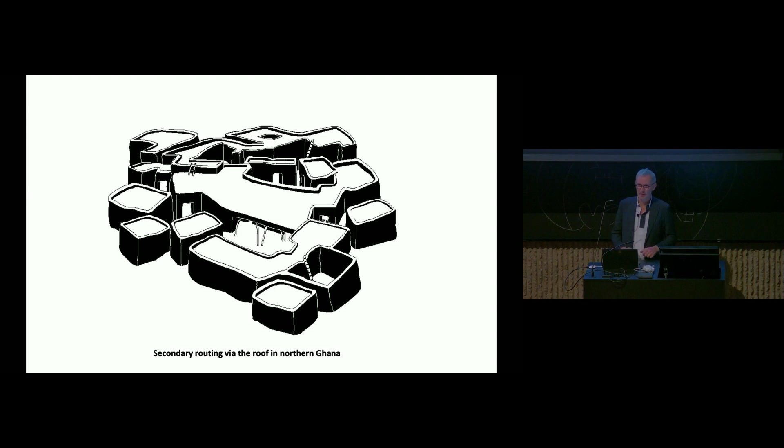And he always came, and that was the most amazing time for 5 years, that he came to Amsterdam 3-4 times a year. And then we sat down and he showed me all the pictures that he made from the research we did. We sent them out and he showed me the pictures. That was also like the biggest gift I had 4 times a year, to see what he had.

People dry food, they're protected from animals, and this concept of not having streets but using this double layer, I find very interesting in a way. Sometimes I skip simply in this whole idea a millennium or 2, but it's just a very rough, and it's also not linear, it's not chronological.

Most of the changes that happened in the world, sometimes things happened at 20, 30 different places in the world simultaneously, and sometimes it was a hybrid for 1,000, 2,000 years, it turned out. I was quite surprised to see that. It went very, very slow in a way. But as it moved on, you saw that compounds became more communities. Because of language, speech, writing started. So organization of life became more complex.

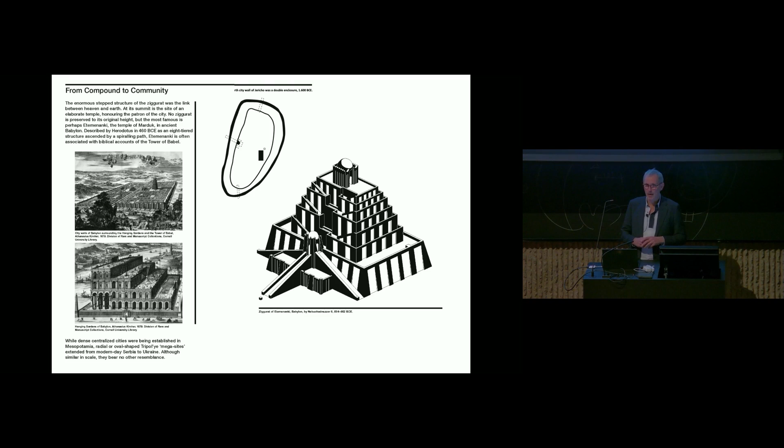And you saw the rituals became also more complex, and there were power systems, so buildings became bigger, became more important. Quite interesting, for example, to see the first ziggurats and the Babylonian buildings, etc. And religion kicked in, of course, very much. So power systems, religion, etc. Ritualization is something else than religion, in a way, with a very big hierarchy.

So there were also the first clear separation from nature, mankind and nature, becoming dominant and changing from ritual to divine worship. Dominant empires, Egyptians, Greek, Roman. There's more than enough to tell, of course, of this. And you saw that

while this happened, it also became that nature was seen as more chaotic and mankind as logic, which is, I think, some people say it was the biggest misunderstanding of humanity. Others say, no, that even started earlier, at the beginning of agriculture, which is a big misunderstanding because that separates us from nature, also from Earth. It is a cleansing of a natural system.

Skip fast forward and you come to a way more complex modern mankind creating societies, clear migration, power systems, etc. We're talking after the Egyptian, Greek, Roman eras, etc. And what you see is in these Middle Age fortifications that with attack and war, etc., you had keeps and mounds and all kinds of amazing structures that did a lot for building forms.

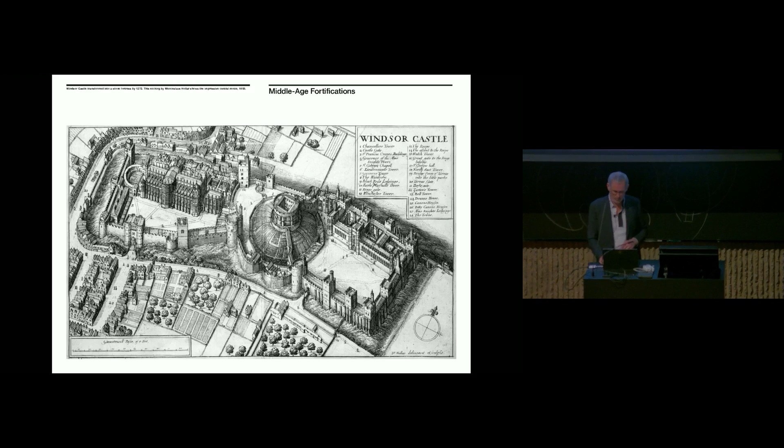First of all, they were always high because there was no gunpowder. Later on, gunpowder came and they lowered walls. They were not higher, but they spread out because they wanted to get rid of the distance that they could overthrow with gunpowder. Quite amazing to see. You see control of people, etc.

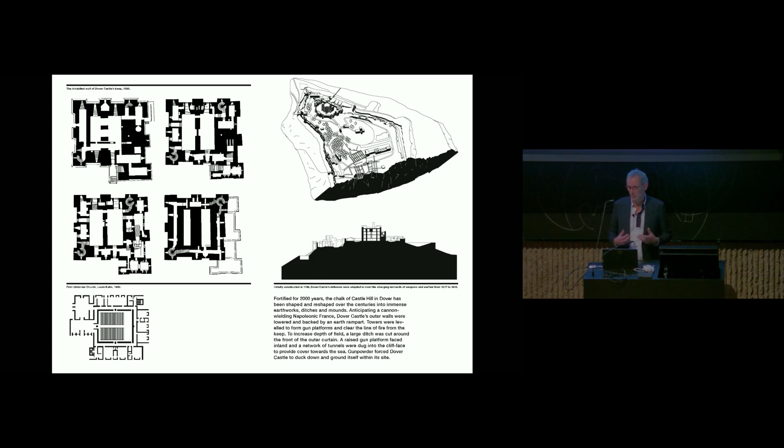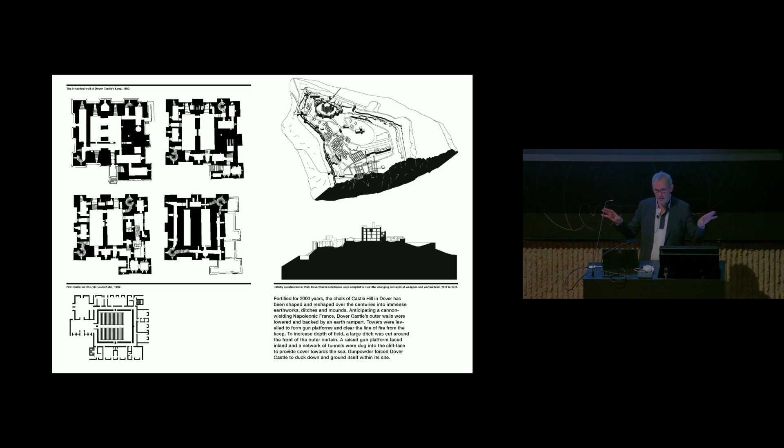And here you see, for example, the Castle of Dover, where all these elements came together. How to protect, how to stay alive, how to keep the power. Amazing systems, for example, under the grounds of the Castle of Dover and the chalk, where they had all these big tunnels from where they could shoot.

Again, fast forward is also what you see around 15th, 16th, 17th century. Public space when the focus shifted more to the private. Life was mainly public, and what you saw also is that the nowadays dominant corridor that connects rooms did not exist really. You went from room to room. And this public space became more private.

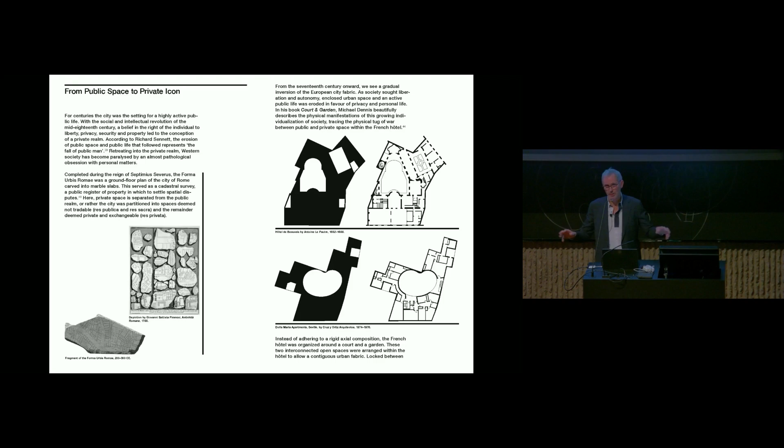What you see is that buildings also, they separated themselves from public life. First of all, it was like one porch with little openings in it. It became like a freestanding building in a couple of centuries.

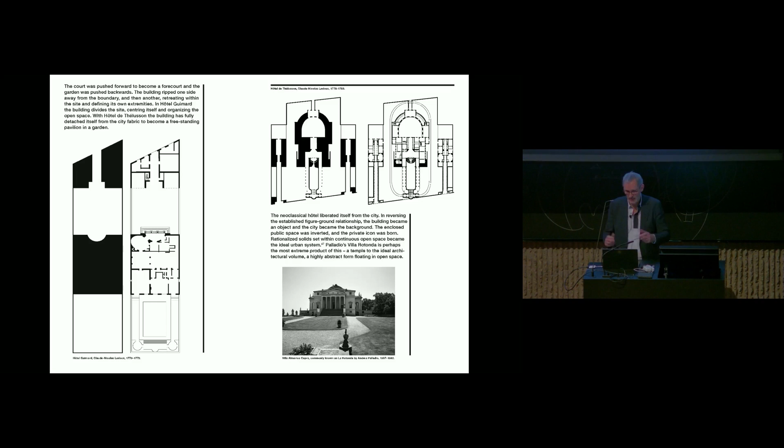Then I'm talking about the dominance of the freestanding building, where Palladio, of course, with the Villa Rotonda, is like the clear object in a free space, where first of all in the cities it was castles and buildings and hotels that had communal walls. Often all four walls were communal, and then you had courtyards that were sort of separated out. Well, Palladio's Villa Rotonda is of course exactly the opposite of this.

And what I came up with, I sort of build it up to a certain moment that had to do with also a moment in time, 1964, which is the only year that growth rate was above 2%, maybe 63 as well, but 64 was the highest growth rate of mankind ever. Since then it declined. I took 64 simply because I was born in 64, but it is of course about this.

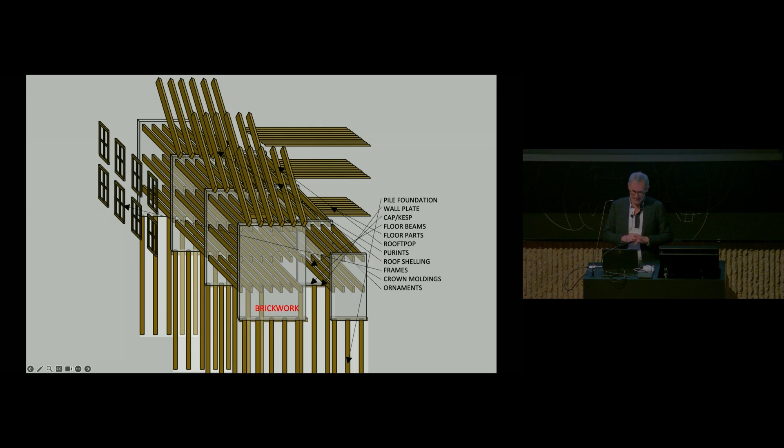But there's also something else, which is about build quality. This is the house I lived in for 30 years, which is built from wood, a little bit of brick. It is in fact completely circular. It can adapt amazingly. I fell in love with the house, and I sold it last year, and I should not have done that. I still miss it. I miss it tremendously. I renovated it completely, and it is amazingly well built.

Here, look at the construction. These are wooden beams. They were transported from South America. By boat, can you imagine? Those beams didn't come from Europe, they came from South America. And they can carry an enormous load.

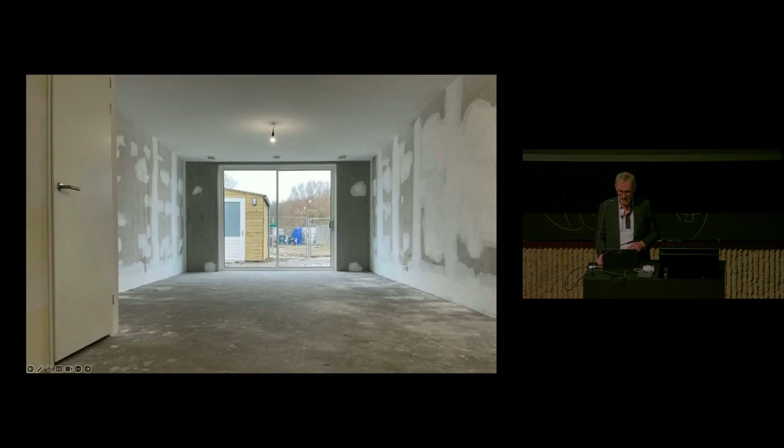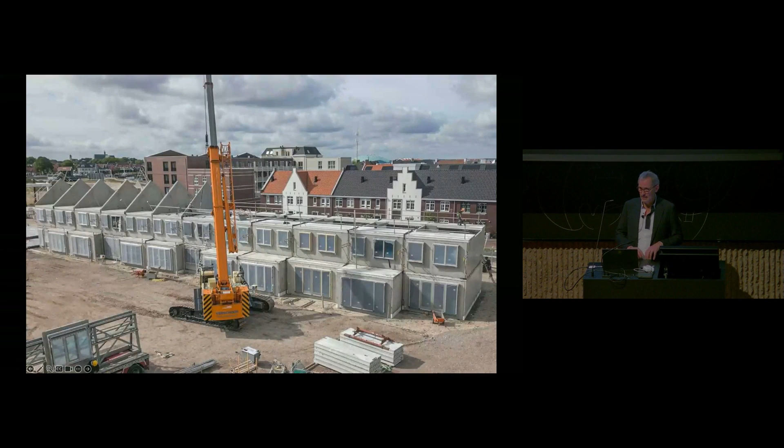This house I'm living in now, it's from 1880. It's flimsy compared to the other house, which is from 1620. It's built way less sturdy. This house is finished. Huh? In Holland, they call this finished. This is the way you buy it, and I think it's sort of a disgrace. It's cardboard made from concrete. It's not sustainable. It's not circular. So what the hell happened with architecture? Why did we not solve it the way we did transport, lighting, health?

So it seems almost to be becoming irrelevant, the way I see architecture, but I think there is a proven relevance that only increases with so many people on Earth, with limited resources, the globe turning against us. We need to do something.

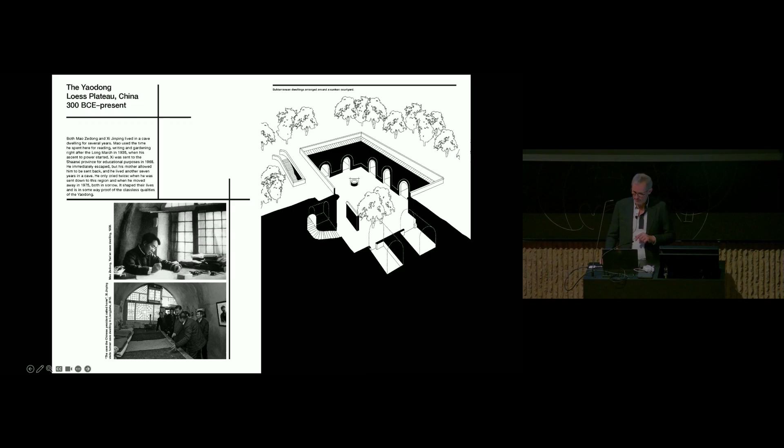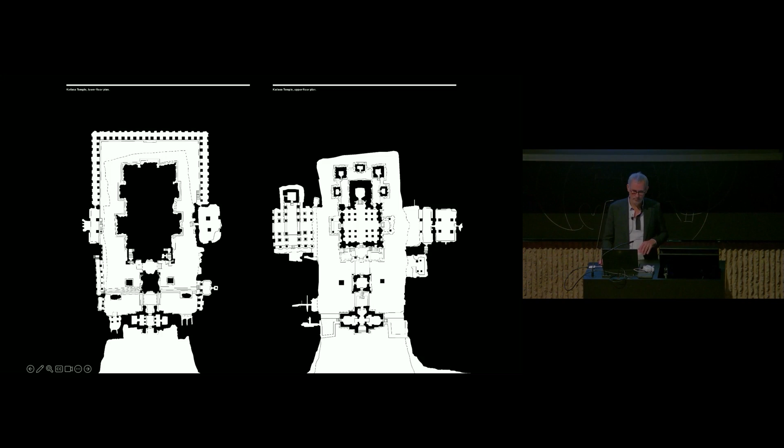A strategy of how to carve out, amazing. You see this rock above your head, which is, by the way, 10-15 meters of floating rock there. I was quite stunned. I also went myself to Lalibela, because we were commissioned by the Dutch embassy in Addis Ababa, and we wanted to build as much as possible with local materials, local people, local techniques, and this was for us like a revelation to see this.

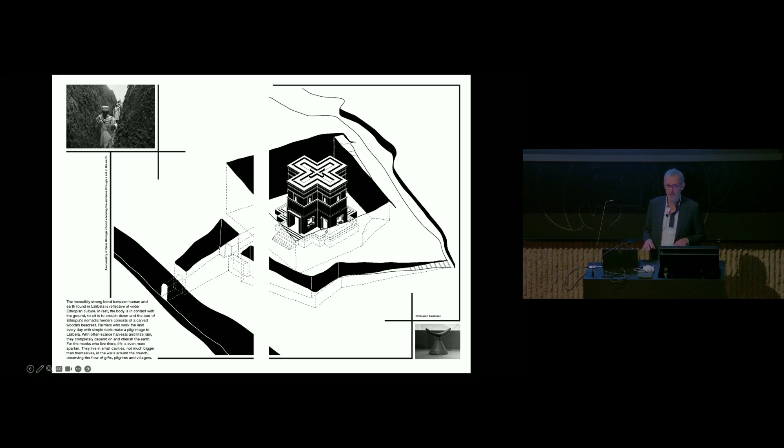How this 700-year-old building is still standing perfectly upright. It's carved out with ramps for ceremony, monks live in caves there. I was extremely impressed how this is organized. A ceremonial place, but so incredibly beautiful.

I worked for Miralles in Spain for a while, and in part on the Igualada cemetery, some small extensions at that time, because there was no money to keep on building, so it went little piece by piece. By the way, he has worked with this amazing idea of the drawings of Garcia Lorca with the tears and the grave on the ground, which is this embedded idea of in a hillside.

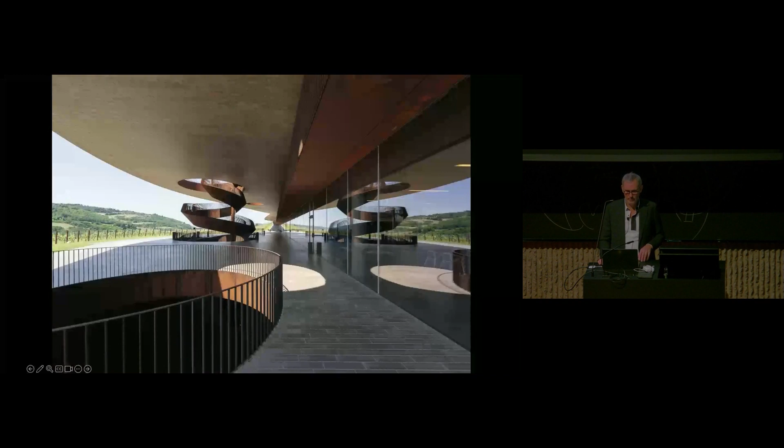Very briefly, Antinori Winery. Go and see it. Amazing how they have gone, after 27 generations of Marchesi, the youngest generation, two sisters said, let's go back to the winery and not stay in Florence in the city. And they built this underground winery, a huge complex like this. And of course, this is what we did.

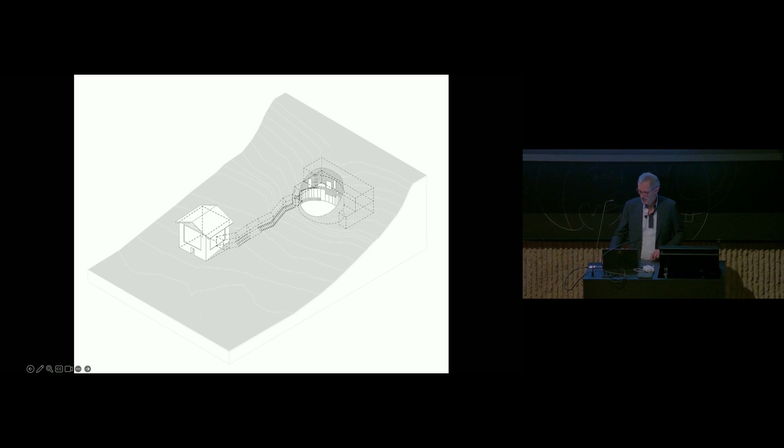And from there, through an underground tunnel, it's sort of a beautiful routing that is more romantic, I thought, for a holiday house. And as I said, that exploded in my face and was rented out ever since. Having a lot of privacy, because it's in the village. Everybody thinks it's outside, somewhere remote. No, it's not. It's next to the thermal baths of Peter Zumthor. It's in the village, but you have this amazing privacy and beautiful view of Alp Tomul.

And lots of fun, of course. I mean, that's what you do in a holiday house, where the transition from inside and outside is very intimate, and the terrace is becoming part of your house in a way.

These strategies of burying we also did with the Novo Nordisk corporate headquarters, the Global Conference Center. There was a big dike 6 meters above the lake, which is an artificial lake, by the way. But we were not allowed to touch the building or extend it. So we made it underground, connecting with conference rooms, opening up the dike, overlooking the water. They asked for very specific, different meeting rooms. That's what we did. It was a layout.

Also, as you see here, maybe in a very small way, it was also a bit, for me, a tribute to Enrique Miralles, who died suddenly because of a brain tumor. Sadly enough.

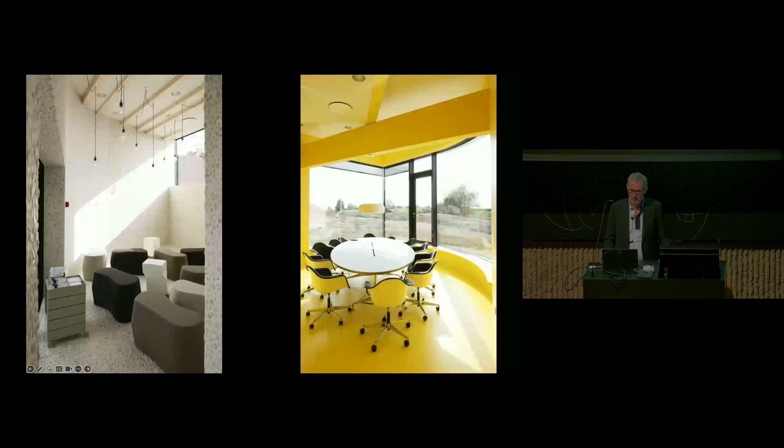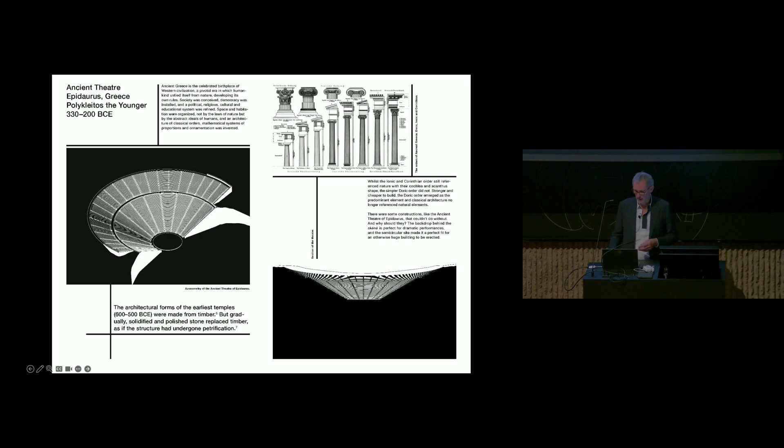The next strategy, embed, as I said, which is more in an open air hillside level where, let's say, underground and above ground merge in one thing, which very obviously, of course, happens in the ancient theaters. Beautifully laid out, acoustics amazing. We can learn a lot from that.

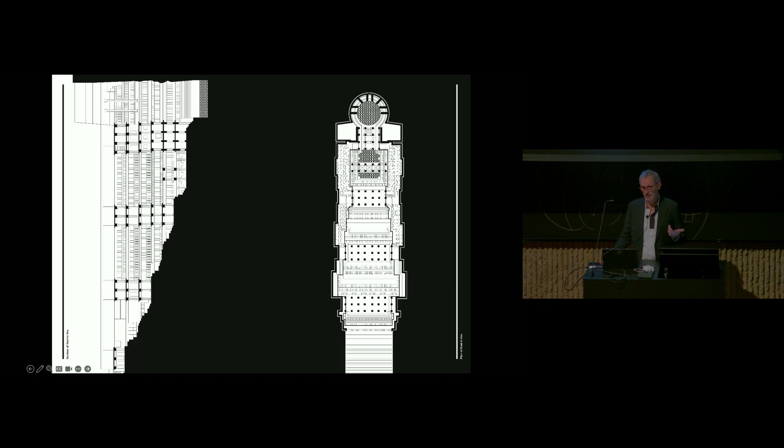Or the 4,500 stepped wells in India, most of which are now used as trash bins, just filled up with dirt. Some of them are restored. It's becoming a touristic venue, but in a way, in the near future, it would be the place to at least have clean water, because they still work. So we analyzed all these. And you see here the most amazing structures we see there.

Or hillside villages that work very intricately with animals downstairs, people upstairs, and then in the level in between you have the routing in front of the houses. Beautiful communities. Almost impossible to go to because you're not allowed to travel there. But luckily we found a stewardess from KLM who secretly went there and made photos. She was a good photographer, and she lent us her images.

Which relates a bit to the Dogon and to the Catalhuyuk roof typology, going in. But this is quite amazing, as you see the roofs here. People gather at twilight on those roofs, and they have ceremonies, and they marry there, they have parties. It's quite amazing.

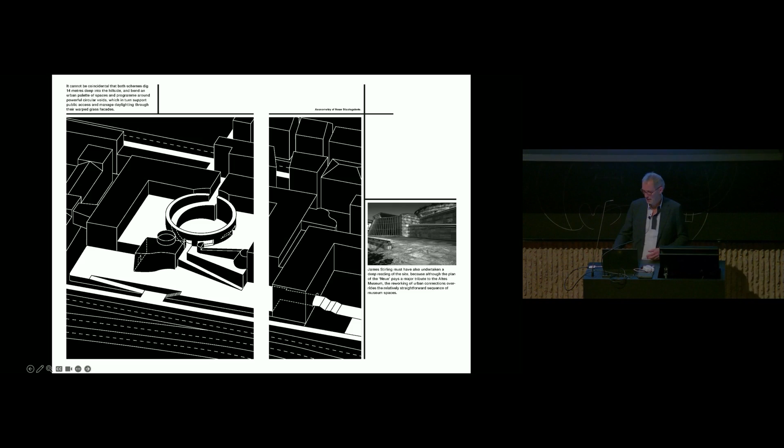But more recent examples, I think one of the routings through a building by Stirling, I think is quite amazing. The Neue Staatsgalerie. Or a very temporary Bangladesh where you have a lot of floodings, where one simple dike and a leveling out creates a beautiful embedding.

We did it in some houses where you see this also, of how to relate to the rock or to the difference in level in another way. Where chalets, this house of the famous painter Balthus. I think it's the most gorgeous chalet you can imagine in Switzerland, in the Gruyère. So how can you make a compact house? Because nowadays they all build these sort of compounds of little chalets, which I think is quite ugly. I wanted to make it into one building.

Garage, the guy is a Porsche race driver, rally driver. Lots of problems with snow. I said, let's do it downstairs and then elevator up. It's a bit of a James Bond house. But it relates to the different levels very much, and that's what I like. So every room you can easily enter by just going one or two steps down or up, as you see here.

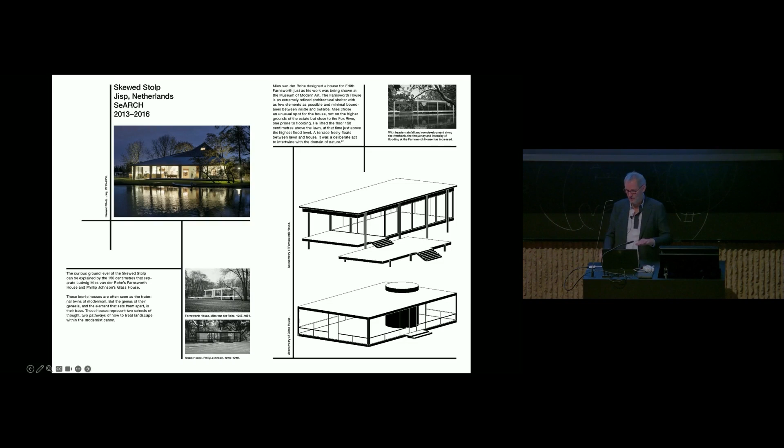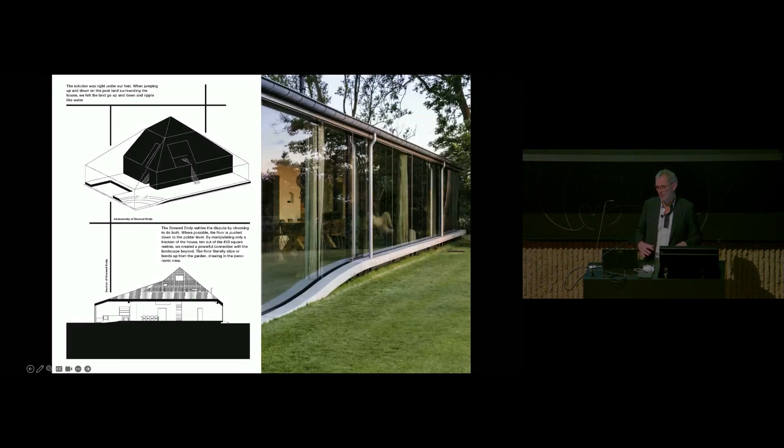Sometimes it can be very subtle, the embedding. Like this, very Dutch. What I did was maybe not wise, because I elevated the house, because of flooding, and I lowered one part of the house, to at least connect to the garden better, as you see here. It just moves down. The client didn't understand at all why I would make sort of a rolling floor down to the grass, as you see here.

He said, well, I can't use those square meters. I said, come on, you have a house of 450 square meters, so those 10 square meters that are a bit quirky, doesn't matter. Funny enough, they now love it, because when the dog comes in with wet feet, it's too slippery, so he stays there. He doesn't spoil the house.

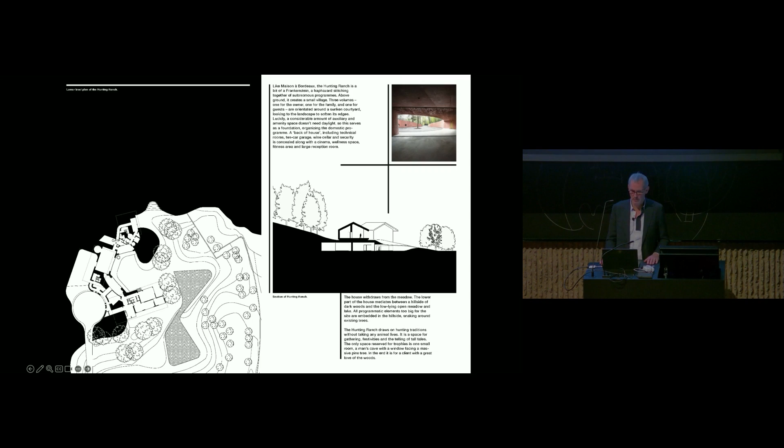Or here, a house that was way too big, we convinced the client to make the house half the size, so it's now 3,500 square meters only. I think it's quite ridiculous. We made it more sustainable than he wanted, but not as much as I wanted, but at least you can do something. Most of the auxiliary spaces we made underground, so that at least you have some acceptable, I think, site specificness of a huge house for himself.

As I said, this embedding can be very subtle. Here it's a little house for a lady that works at the biggest bird society in Holland. She's a bird watcher, so we made an almost snake-like house that relates to very different landscapes, although the house is of course fixed. But this snake-like house gives her the possibility to watch the small birds in the woods in the front, to watch the little lake as you see in the top, the bigger birds, the sea eagle even comes here sometimes.

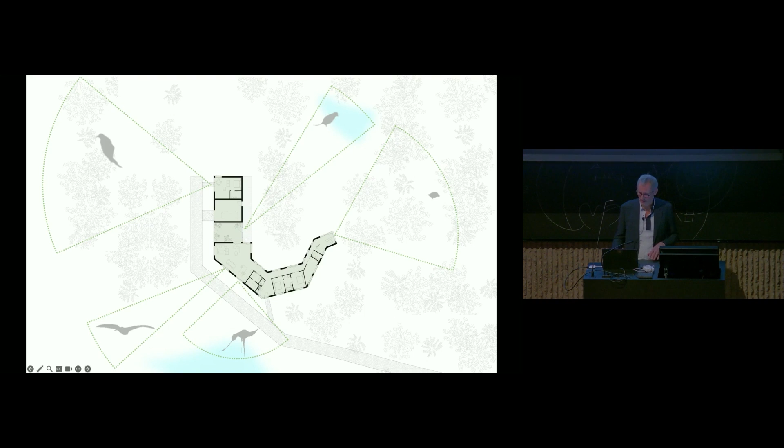The migrating birds in the polder on the left you see, or the somewhat bigger birds in the salt marshes. There's some salty kwelder coming out at that area. So how one simple form can relate to very different landscapes was the idea, as you see here.

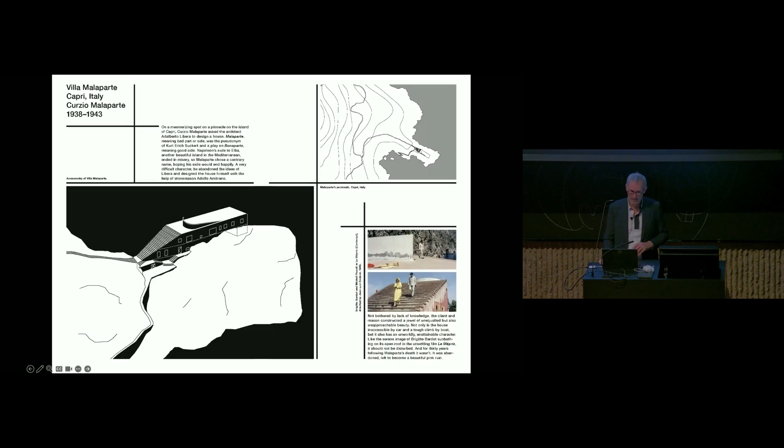Third strategy, absorb. That is about where, let's say, the identity of the landscape is sort of pushed inside the building, was our idea, with these beautiful examples of Casa Malaparte, the most gorgeous house. Most people don't understand the scale of this house, I think, because it's enormous. It's absolutely enormous. But there are gorgeous examples in Brazil, for example, this Costa Brava Club by the brothers Menescal, which is a very brutal building.

It is extended 4 times, but this one thing makes it, which is this rock that sort of comes up in the patio towards the main pool. I think it's quite amazing how site-specific and how beautifully it resonates with its stunning landscape. And even the main pool downstairs, the saltwater pool, where the rock is almost like a big whale waiting in that pool.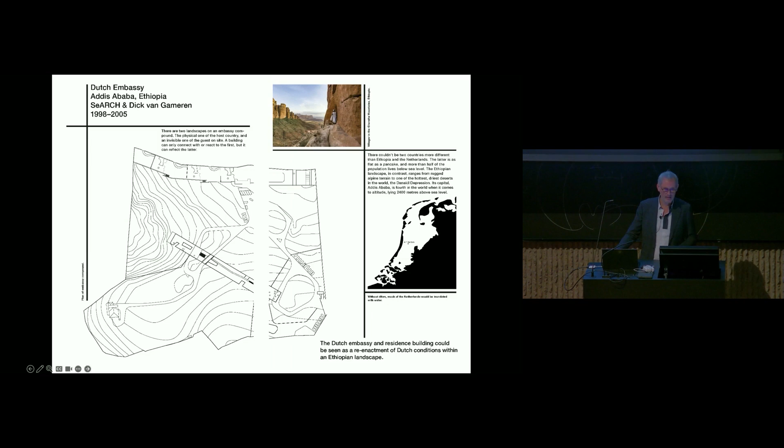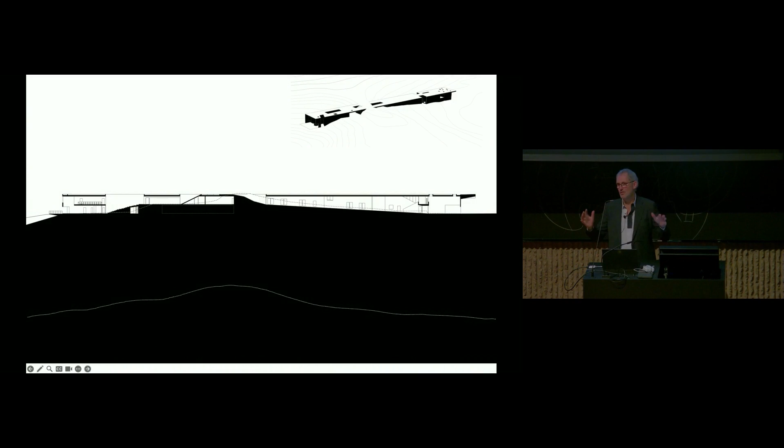As I said, we did the Dutch embassy, where we try to sort of do what Lalibela did, but of course you can't carve out an embassy. But at least we try to relate to that and sort of use the relief of the landscape. This is Ethiopia. Well, this is Holland. So we made this beautiful water roof. In the rainy season there's water on the roof, which is the horizontal level of Holland, and then the relief, which is not that much there, is used to separate the residence from the chancellery, and then the ambassador can walk over the roof, a bit like God can walk over water, to his

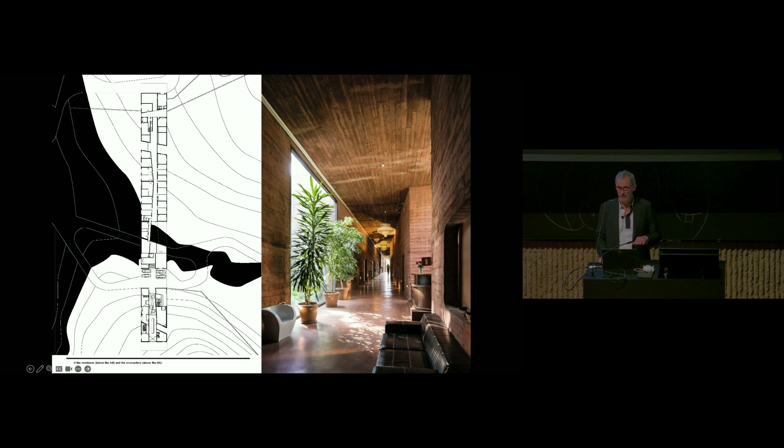department. And here you see the main corridor in the embassy is a ramp that connects all the rooms, and then at the very end you come out, you go to the roof, you go over, you can go to your house as ambassador. This is the main routing.

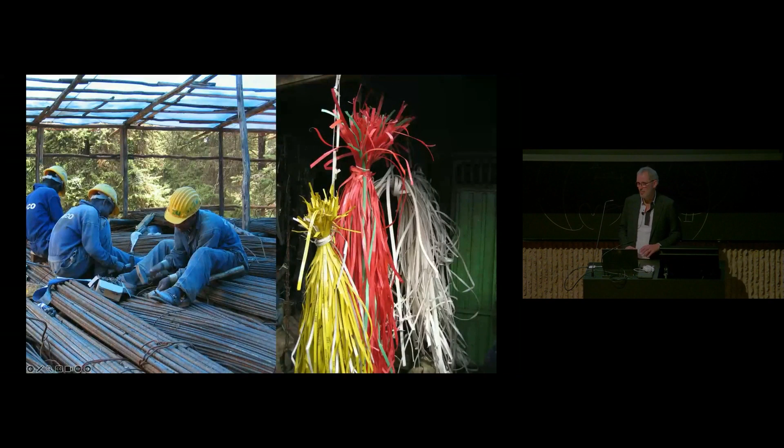And what we learned from Ethiopia was amazing, is that if you have limited resources, you reuse everything. I was absolutely stunned by the ingenious way of working, of reusing, etc. And since then we have implemented that in our work. Of course, completely different, but let's work in a different, more efficient way. It's all efficiency, in fact, in Ethiopia.

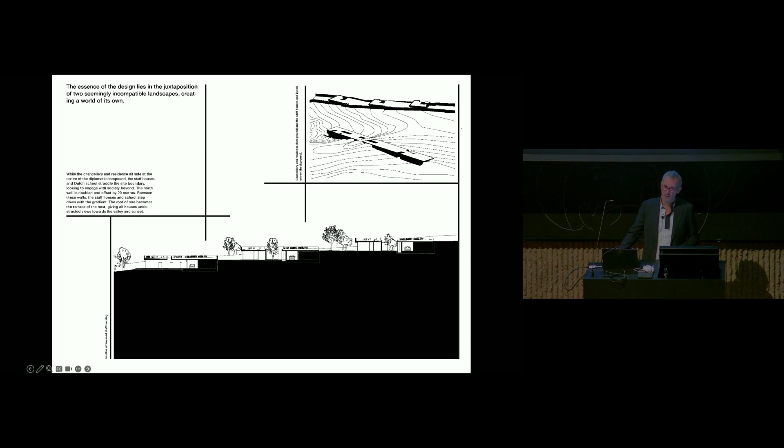Here we created sort of a very sculptural routing, where the 3 service houses for staff are also in the hillside. So the house has a garden, and the garden is the roof of the next house every time. As you see here, you overlook, you have a beautiful view of the valley. This is your garden, and under that garden is the next house.

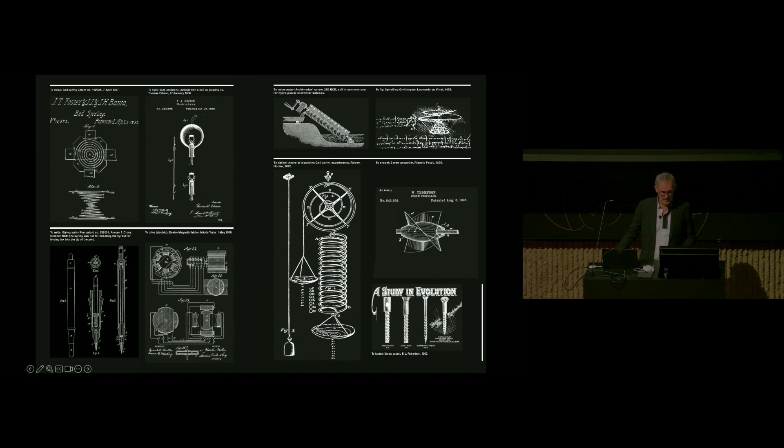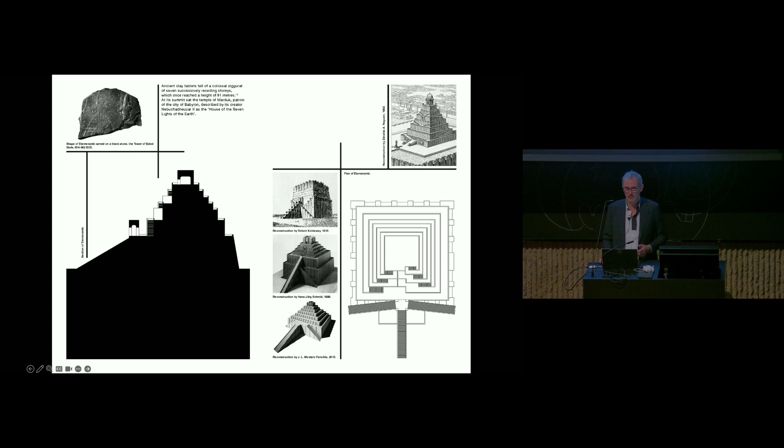Briefly go to spiral, then, and the last one. This is a very interesting topic. Found out that everything is a spiral in life. It's because you have the bulb, you have the mattress you sleep on, the spiral, the ball pen, the electromotor, propelling of whatever, the screw fastening. In architecture, it was a bit lost. You could say you have the Guggenheim, of course, but now there's an enormous resurrection of spiral and of leveling out of buildings. I think it's beautiful to use that richness of possibilities that we sort of analyzed.

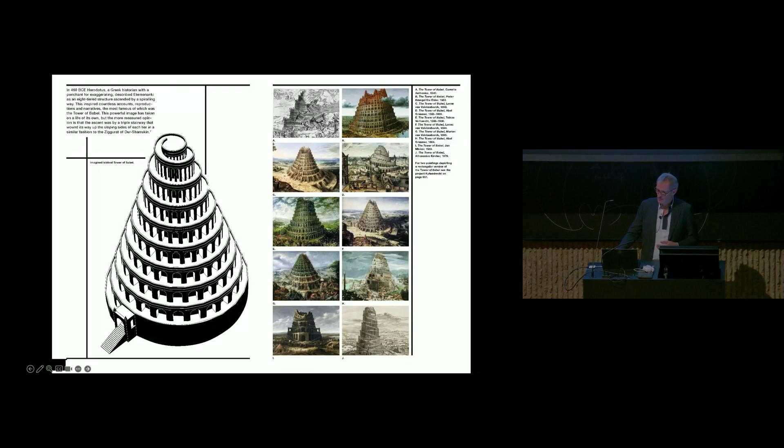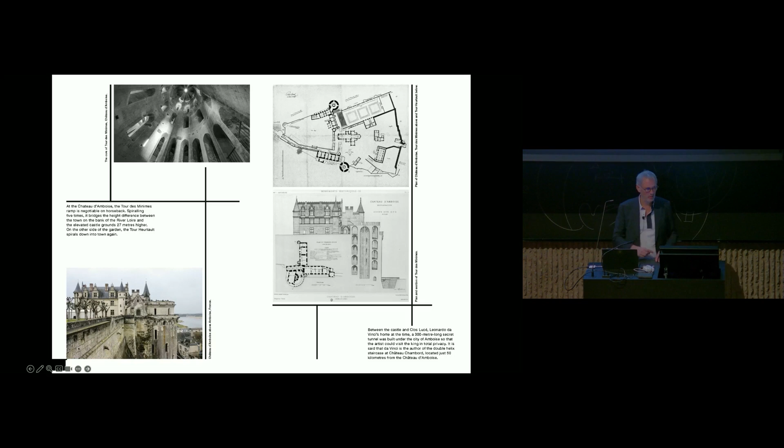The countless paintings of the Tower of Babel, the square ones, the round ones, the ruined ones, but the real built ones as well, of course. Or even the castles in France where the horses can spiral up from the riverbed to the main rock. They turn 5 times and then they're 27 meters up. Quite amazing.

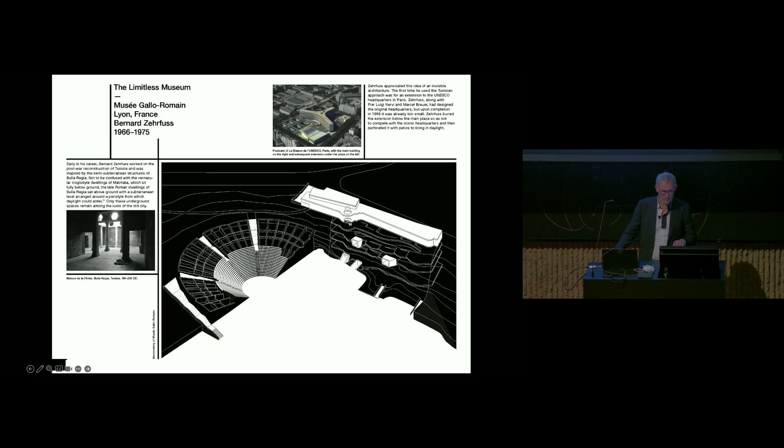As I said, spiraling, one of the most beautiful examples to me is the Musée Gallo-Romain by Zehrfuss. Also did the UNESCO building, parts of the UNESCO building. But here next to this amphitheater, some peeping out windows, but inside that hill, is this amazing concrete paperclip-formed structure of ramps that tell the story of the Gallo-Roman period. Beautifully laid out with minimal obstructing of the beautiful amphitheater.

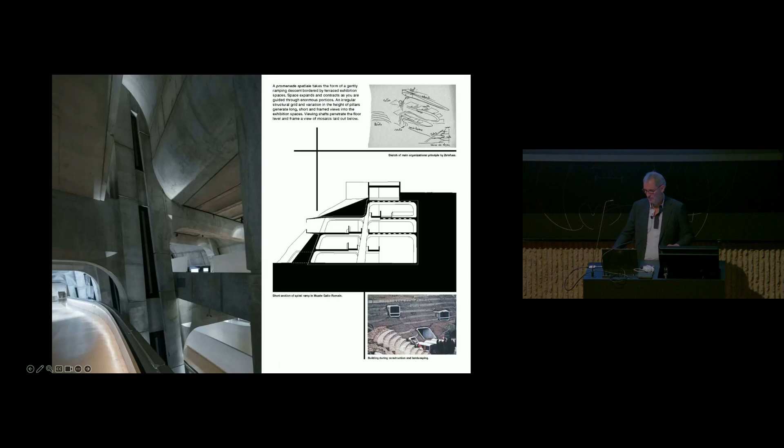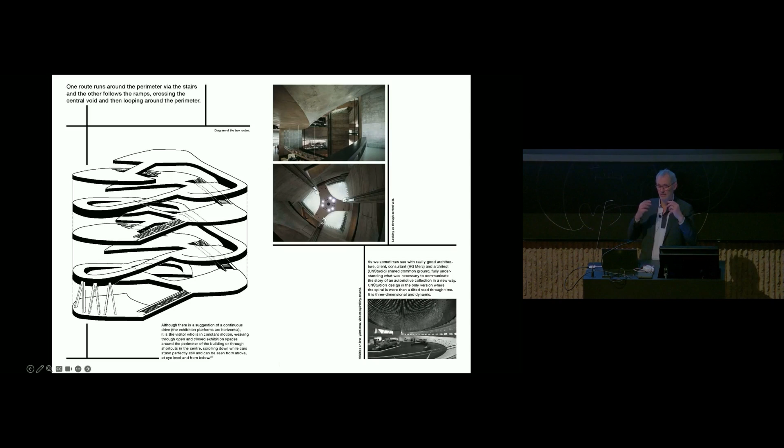Beautiful examples, of course, temporary. I think Ben van Berkel did here, UNStudio, an amazing job. Talking about the drawings, all 600 drawings in the book are done by my office, and I think this drawing was the most difficult one to make. It took them about 6 weeks, interns, redrawing, until we found a way of making an axonometric or a sectional drawing that immediately tells everything when it comes to the connections.

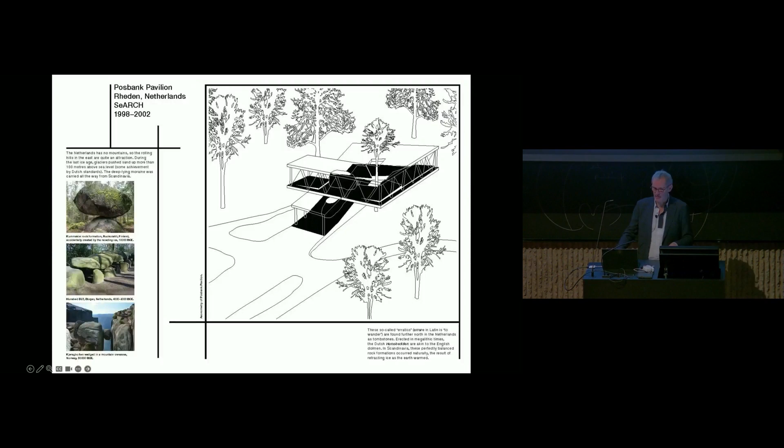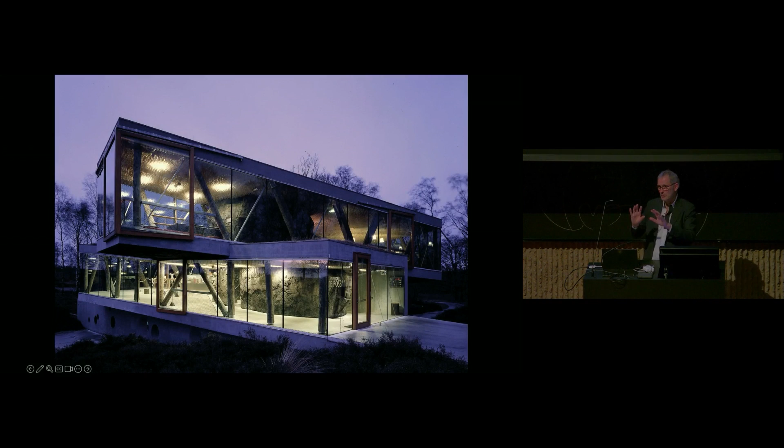We worked very early on a pavilion, which was a little restaurant that burned down. They wanted to have a new pavilion. I thought, let's do something with this idea of the moraine rocks that you see in that part of Holland, that were taken by the last ice age to Holland and stayed there. So we used that idea of those rocks and this sort of move. These are our real mountains in Holland. They are 100 meters high. And we, of course, like to emphasize that. In a building that spirals up, and from there out you can see the beautiful landscape in that area.

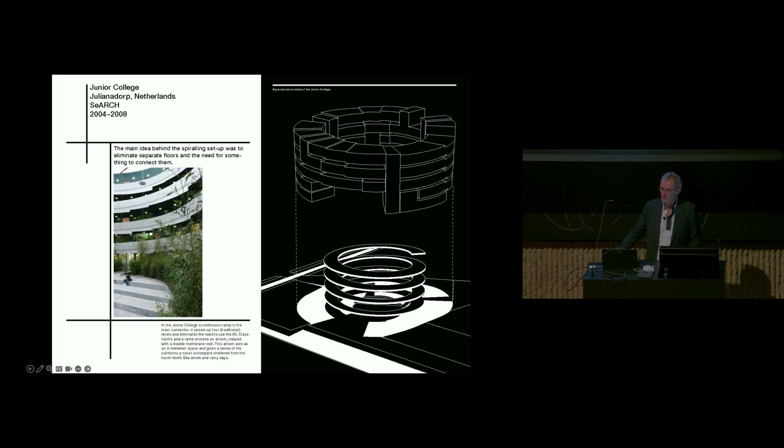We even did a school, it's a school with 3 different sections, but they want to have the flexibility that one section grows and the other one shrinks. How do you do that in different floors? So we proposed this spiraling school, and the client said, give it a try. Let's see how it works. One day a year they have a competition where children can run down on chairs with wheels, and the fastest one gets the prize.

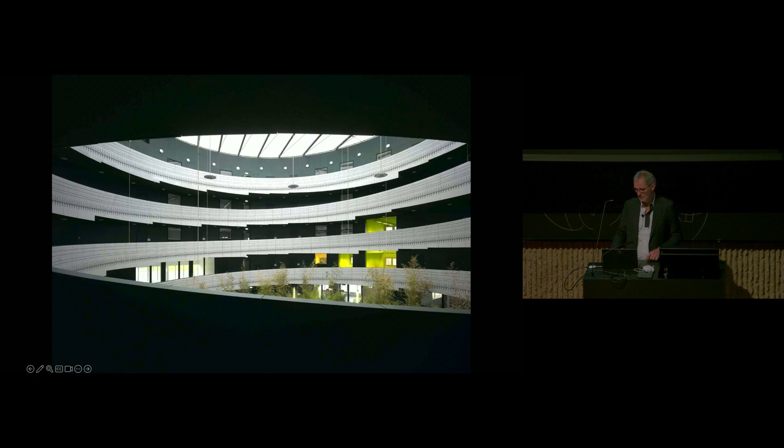Carving out, well, this is, I think, the building with the worst division between mass and opening.

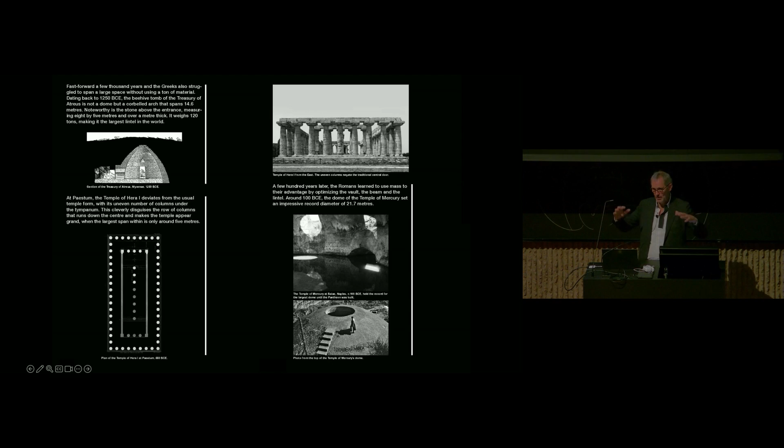What I learned is that mass was absolutely necessary to make a span, because in that time we needed the pressure. So you couldn't make light structures that spanned a lot, so you needed mass, of course. Stupid me, but now I understand how it works. And this building was the biggest span for 1700 years. For 1700 years they did not succeed to make a bigger span.

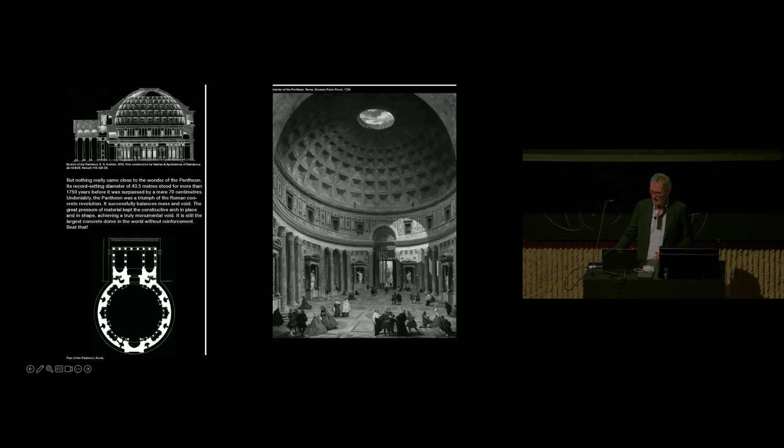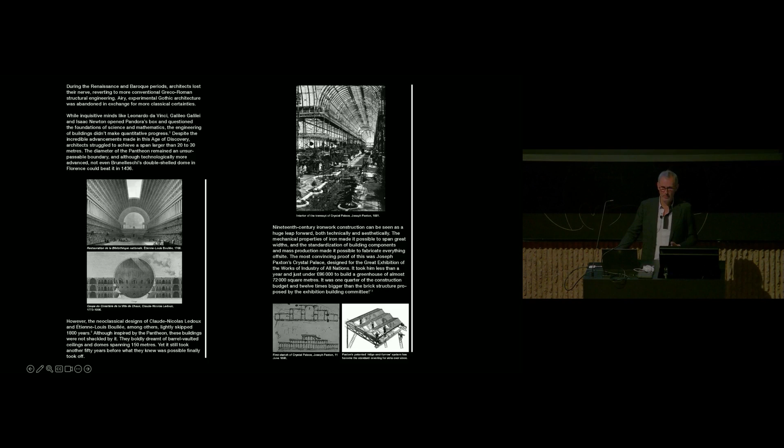Or they used trusses, or they used the Gothic churches. It was about mass to make a span. That in the end, the carving out, we got rid of, because we had industrialization, we got steel, and that ended up in buildings that were so light that only needed structures even lighter than trees, and glass that you could look through, ending up in the biggest complex in the world around 1900, with the least amount of material, the most amount of space. And I think there has never been a building I like that much.

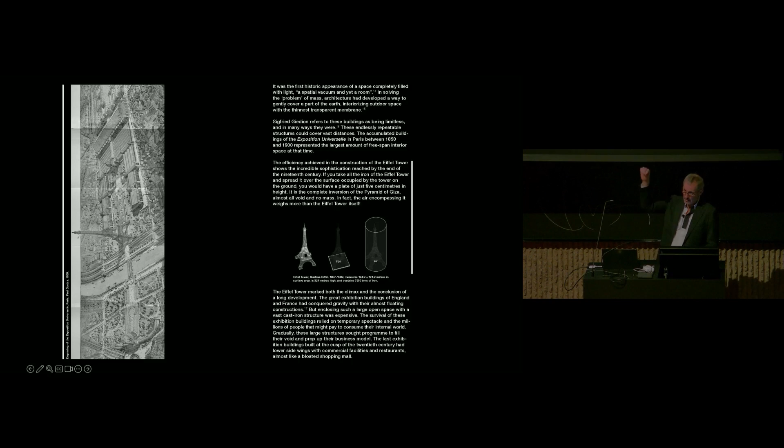You need an iron steel plate of 5 centimeters thick, which has the same base as the Eiffel Tower, and that's all the steel in the Eiffel Tower. Or to tell it in a different story, if you put the Eiffel Tower in a cylinder of air, the air is heavier than the steel of the Eiffel Tower. We can't build lighter. It was done at that time already.

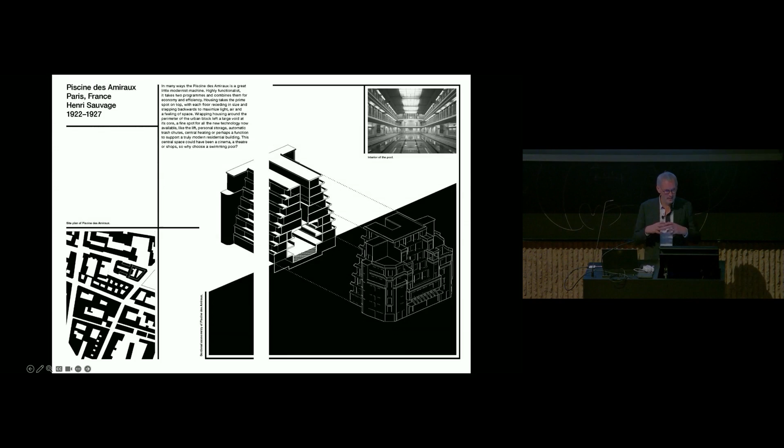But we are interested in this carving out, in using vaulted examples of the beautiful buildings in the Piscine des Amiraux, where not a theater or whatever was in, but this time it was a swimming pool. Because of sanitation, people thought of light and of air and of sanity at that time. They made amazing, beautiful constructions where housing was sort of the mass for another function.

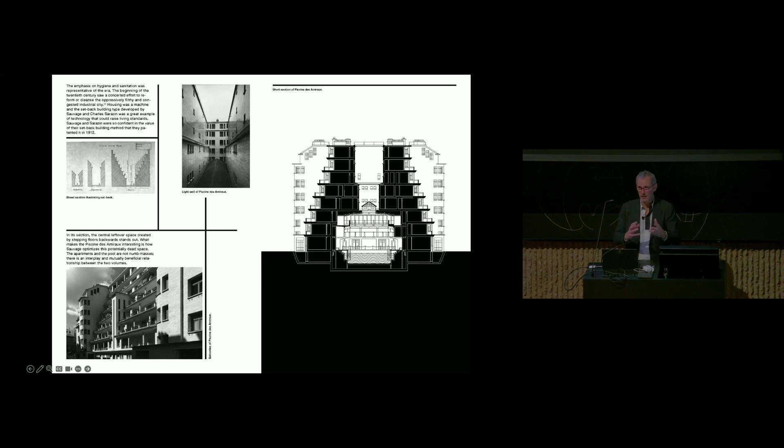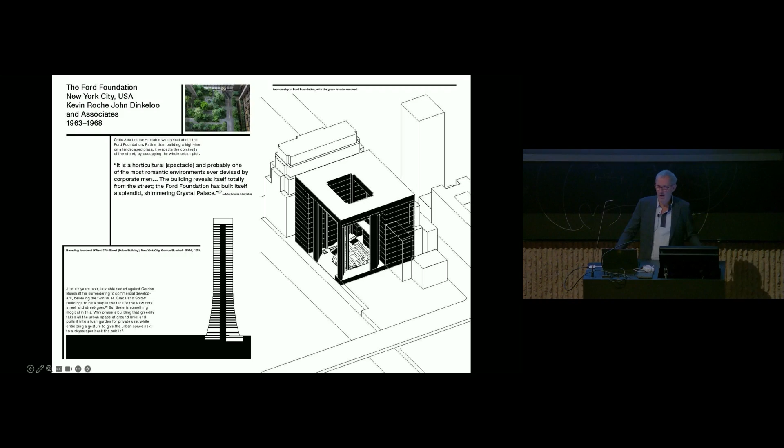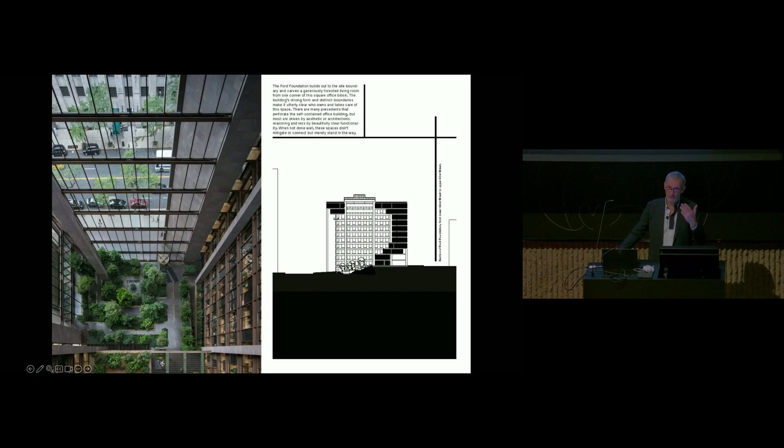As Kahn did. And I'm extremely intrigued by the Kevin Roche John Dinkeloo building, where a piece of nature, you could almost say a park, was incorporated in the cube, becoming a totally different kind of office building than before. So this section, I think, is quite amazing. Again, guys, sections are so beautiful to study, to watch, to make also. They explain so much.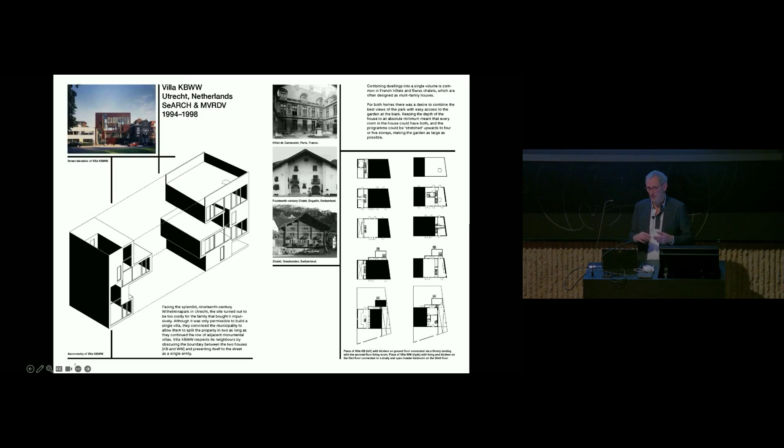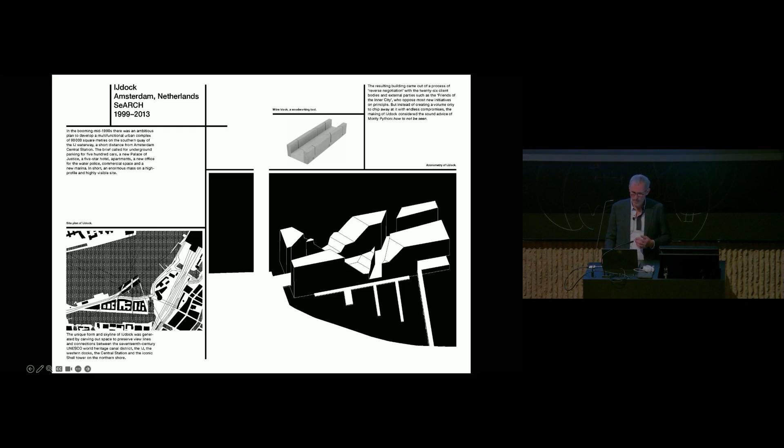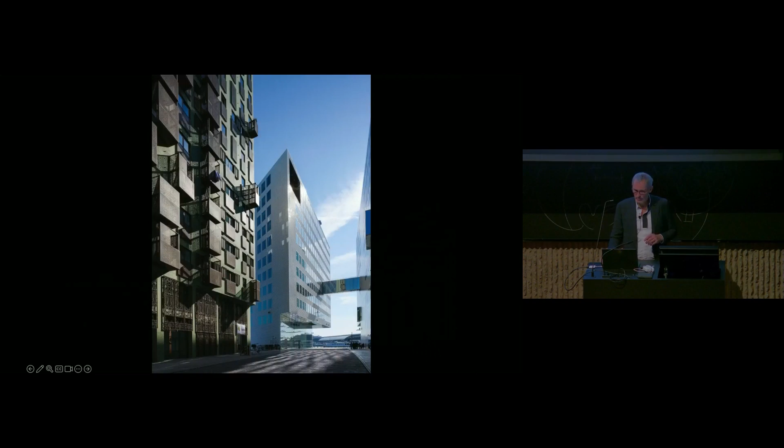Or we used for a 100,000 square meter building, the IJdock in Amsterdam, a block. We made a block of 200,000 square meters. Then we started carving out so that it got linked to its urban structure. I don't know if you can see the lines very well, but to explain to you, it ended up in 5 buildings.

By redirecting those cuts, you could perfectly shape them to a certain amount of square meters, and therefore, as you can see here, creating a huge dip that is in line with the Keizersgracht, so that from the Keizersgracht you don't see this animal lying there, or you link the little street across the small harbor through this building, so that you perfectly see the beautiful Shell Tower from every point in the city still, and not block the view.

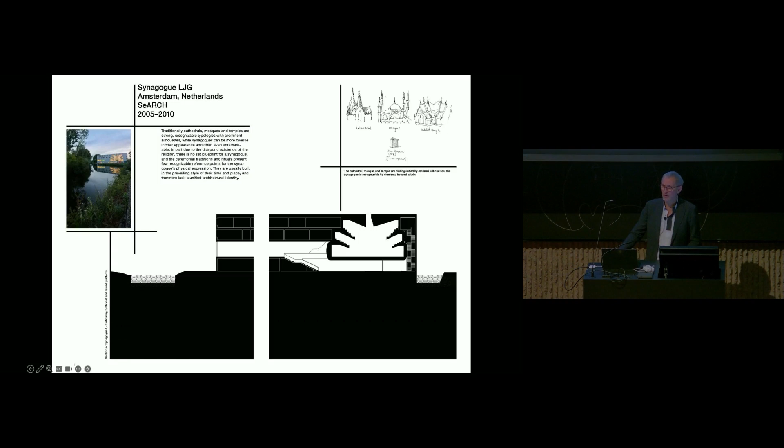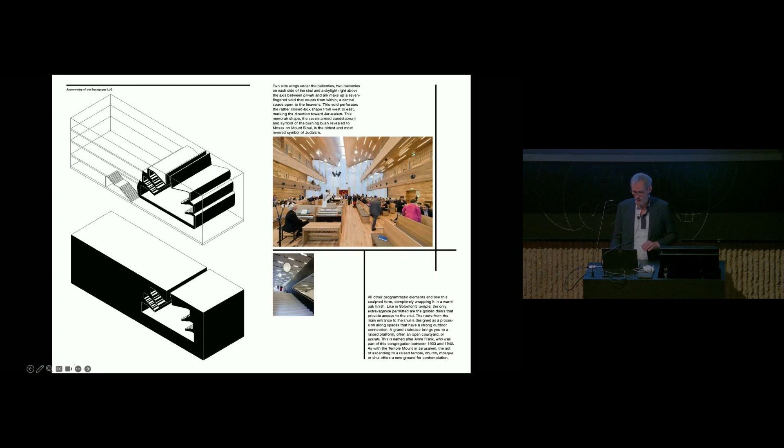We carved out a synagogue, a shul room. It's one of the biggest shuls in Western Europe, 960 people can enter in the shul space. Due to a limited amount of money, we made a very simple shoebox, and in that shoebox formed a beautifully formed oak wood shul room, which forms with the 2 balconies and the eternal light in the top and the main floor, the 7-armed chandelier in a way. That was the idea behind it.

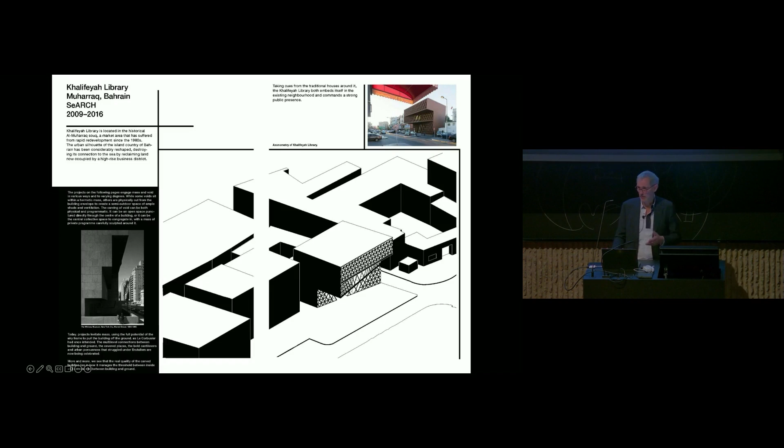So the carving out, as you see also with the Whitney Museum, where urban space is taken away from a solid block, so that you get a much more intricate and beautiful interaction between inside and outside, creating an entry that we worked on in the building in Bahrain. This is a building of only 500 square meters, but the site was only 110 square meters. So we carved a bigger block back to 110 square meters on ground floor to be able to make it.

Last, very briefly, I have 2 little films and then I'm done. The mimic idea of using, what is nature? How does nature evolve? Let's stop the discussion. We are nature, and a building is nature. It's very simple. Everything is nature.

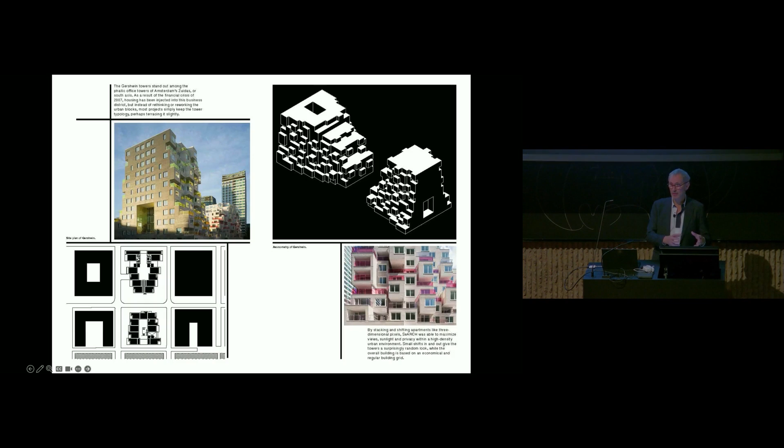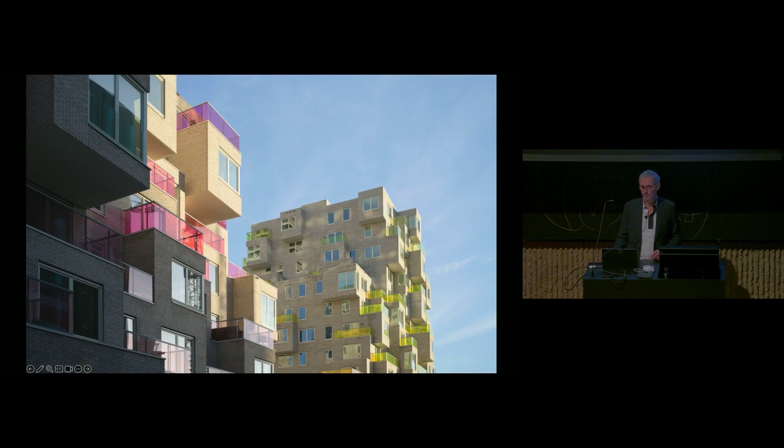Or mimicking, as we did here in the financial district of Amsterdam, a sort of rock formation with a huge vaulted entry hall. Because we had to reconfigure office building plots into housing, which is almost impossible because it's way too thick. And what we did is we squeezed it into a rock formation, and therefore were able to build in housing, where at least your balcony is not a repetition of the same, but it's open, you have nothing above you, which is, I think, much nicer, and the balcony is much bigger.

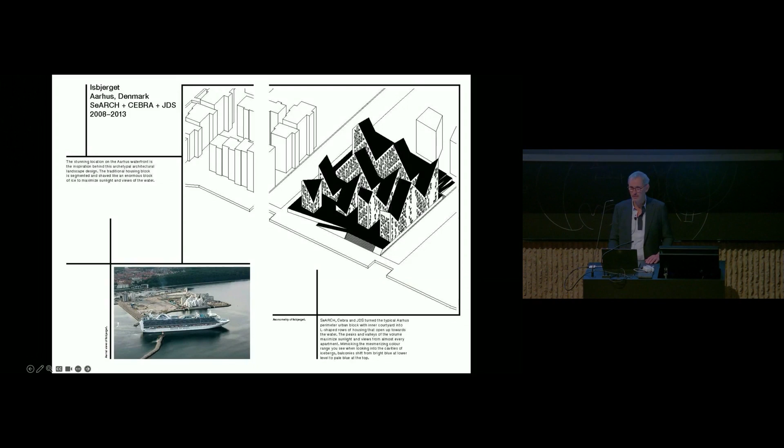We did, together with CEBRA and JDS, the Iceberg project. I will show a little film, and then I have a film of the last project, which is the hotel, and then we're done. And now I need to try and get to...

So in this project, the idea of this iceberg, where there's always 90% underwater and only 10 above, it tells you a lot more than only what you see. But here we used the coulisse, the different combinations of the pyramids, so that wherever you are in the project you see the sea, although it's layered in 4 levels. It's absolutely amazing what they're doing in Denmark at the moment with harbourfront areas.

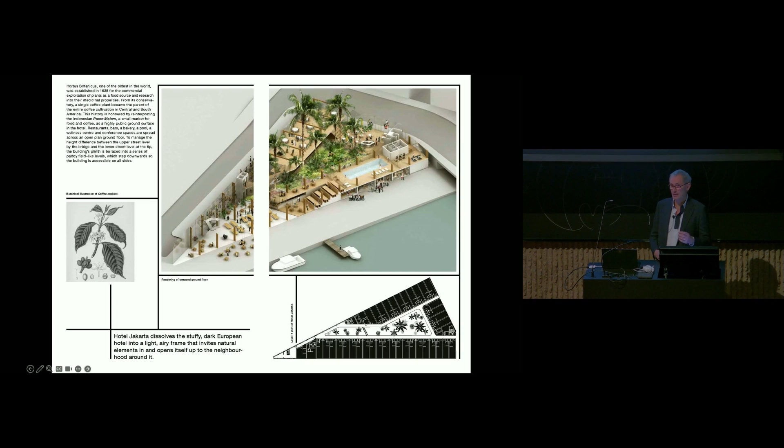As you see here, it spirals up almost from the lower level under the bridge to the bridge level. And last thing, what I really like in the building is when you enter through the revolving door, you never have to touch one door until you reach your room, because it's all open. It's like a landscape, and that's what makes it work very well. I will show you, and I would say this is the end.